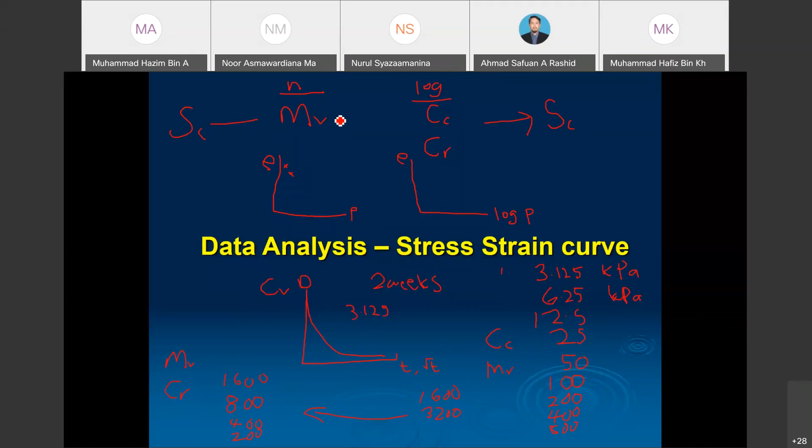Okay, results of consolidation testing are presented by plotting the void ratio at the end of each increment period against the corresponding effective stress, on a linear scale, or the e-p curve. Okay, so imagine this is our plot for the loading process, while this is for the unloading process. So mv only represents the loading process, not the unloading process.

So untuk dapatkan the mv, we should determine what is the av. Okay, so av we can gain from this slope. For mv, there will be two values of mv, normally for one typical type of soil. So for example, the green line may represent the mv from the range of 0 to, for example, 600. And the second mv will be obtained from 600 to 1600 kPa.

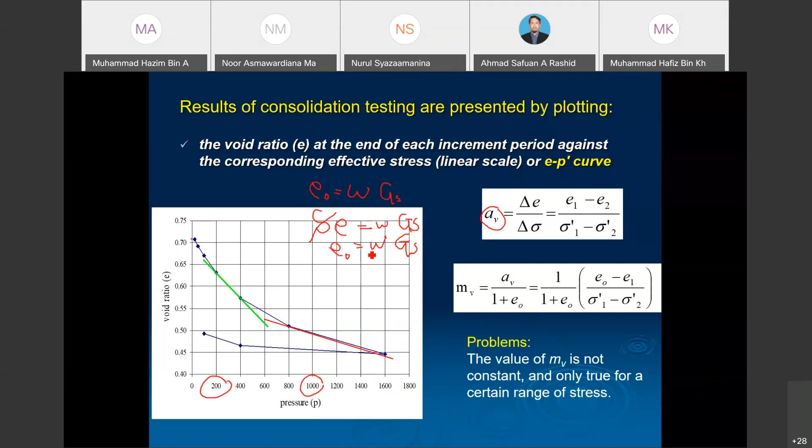Okay. So what is the initial water content, times the specific gravity. So awak dapatlah the value for the e, or initial void ratio. Okay. Ada soalan? Okay, clear.

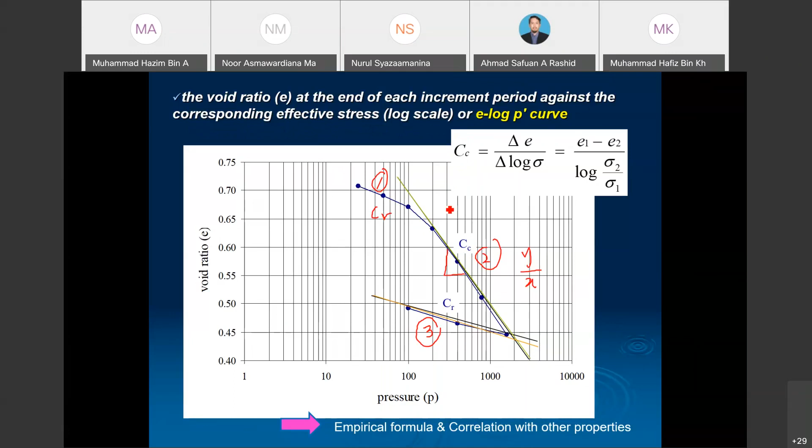Andai kata, untuk kita verify ataupun untuk validate balik this CR and CC value, so what should we do? We can use the empirical formula and correlation with other properties. So there are a lot of formula untuk determine the value for the CC and CR based on other soil properties. For example, liquid limit, based on void ratio, based on organic content, ataupun based on specific gravity dengan plasticity index. So boleh digunakan all this value.

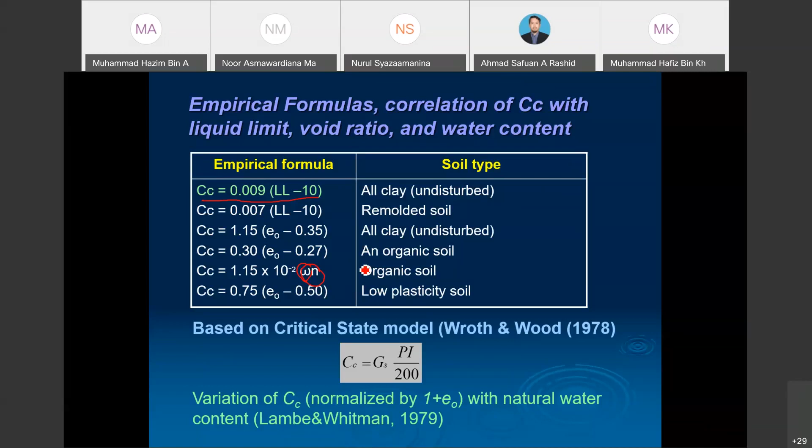Or we can base on critical state model from Wroth and Wood in 1978, menggunakan specific gravity times plasticity index. So plasticity index kita boleh dapat by Atterberg limit test. Okay, that is for the CC. Then we can determine also the CR, once we have determined the CC. So CR range dia dalam 0.05 hingga 0.2 CC. That is for CR.

Or we can use this formula, which is CR is equal to CC times 1 minus A. So A is approximately 0.8, for the Gs of 2.7. So dia adalah syarat lagi. Or PI over 370 is the value for the CR. So the best option is just spend at least 2 weeks to get the result from the oedometer test.